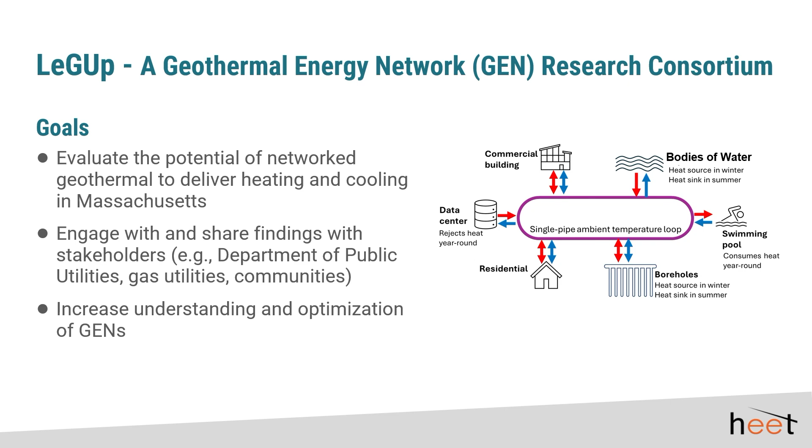And they are, for example, for the technical modeling of these systems, but also the economic modeling, as these systems get financed, what is the cost to the customer, et cetera. And the idea is to study what is the impact of these systems in the entire state of Massachusetts. So if you were to deploy them, what is the impact on a number of different factors, including health, the environment, costs, equity, etc. So it's a research project that is focused on geothermal energy networks, but within that, it looks at many different aspects of it.

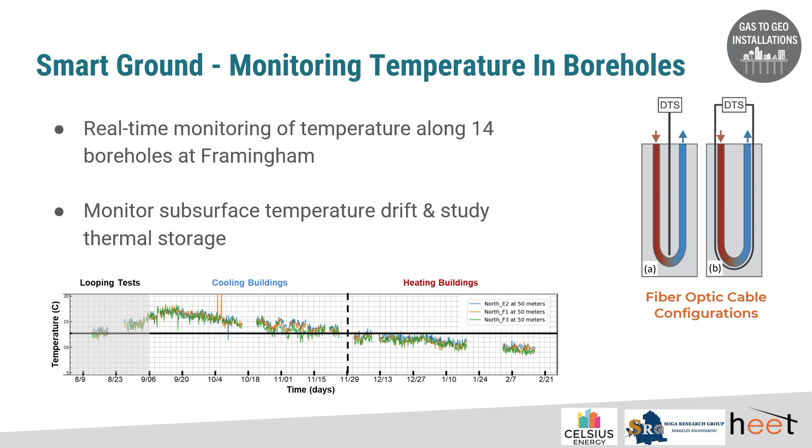Another aspect that the project focuses on is the development of these tools that are accessible. So, for example, one of the tools that is generally used for designing these systems is TRNSYS, that many of you may be familiar with. Now, usually only engineering firms have access to it, and even within those firms, only specialized teams work with it. So the idea was to create a tool that is more accessible. It's written in Python, it's open source, and it will be basically on our website. It's already functional. It doesn't have a user interface right now, but it works.

And this tool is built by NREL. And so in the modeling part, there's teamwork between NREL and LBNL. LBNL created this full physics model that is meant to capture all the complexities of the system and is used to validate the simpler reduced order model tool that was created by NREL, which is the one that we actually make available to everyone.

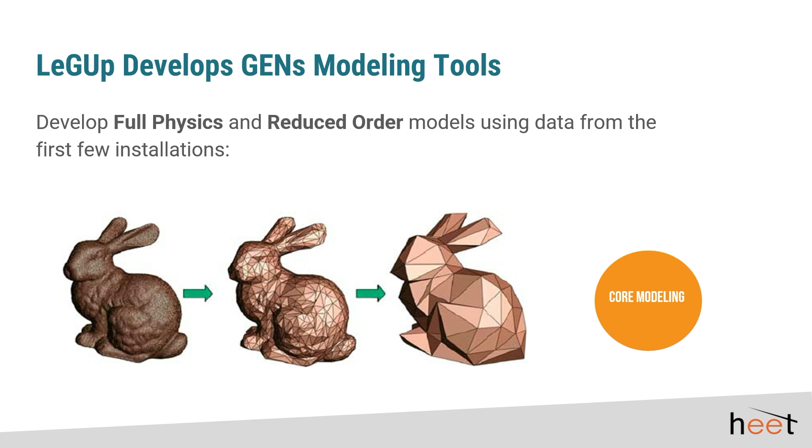So the idea is really that as you're doing feasibility studies or in the early stages of building a network, you can play with this tool and look at, okay, if I add more buildings or if I add more boreholes, what does that do to the temperature in the loop? What does that do to the coefficient of performance of the system, that will then impact economics, as was mentioned in one of the panels earlier on with a graph actually by Ania Camargo. So these tools are meant to help you ask questions about your system.

Okay, so other aspects that the research group is looking at are impact on emissions, but also on the electric grid, on costs, as we mentioned, on ecology, on health, and on equity. So what happens when these systems are deployed at a large scale?

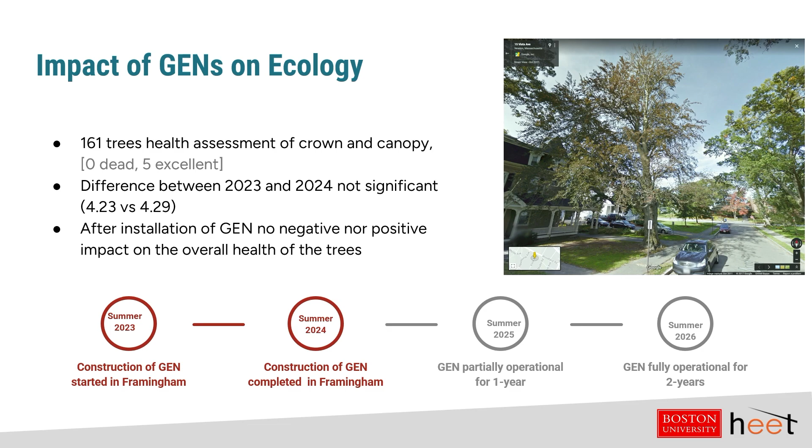So there's a number of factors that you want to take into account and to combine them together with an algorithm that you can then modify to make an optimal decision. So these are tools that are being built right now, and this product is already available, these dashboards. And we will share all of this towards the end, how you can access it.

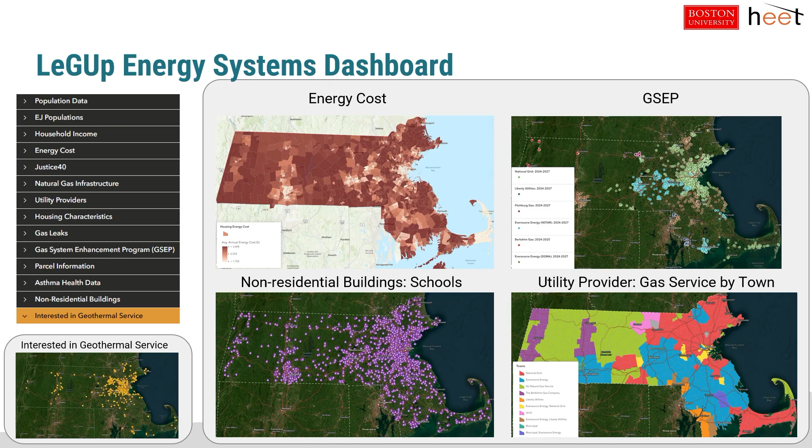My colleague Angie already talked about the feasibility program in Massachusetts, so I'll be very brief. But basically, 8 communities were funded through this research program to do feasibility studies in their communities, and 4 communities were funded to do site selection and community engagement. And some of the highlights of this work is early community engagement with municipalities and community leaders is very important to impact the momentum of the project, and also that policy and regulatory hurdles can be perceived as a challenge for those non-geothermal experts. Move on.

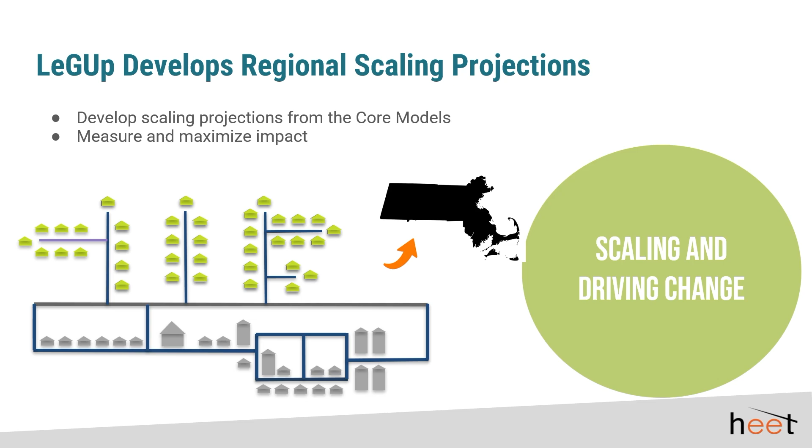In terms of deployment, one thing that we want to do is to maximize learnings. So how can we maximize learnings from the systems that are already implemented? One thing that we thought is if we have a database where we can share information in a systematic way about all of these systems, and this is already available, it's live, and what we want to do is to populate it now with data. So if you are a developer or a utility that are working on these projects, then we'd love to talk to you to populate this database.

So the idea is basically if you're a community that is doing a feasibility study and you want to know what is the size of the main pipe that was used in Framingham, you could go ahead and look at it, not only in Framingham, but in all the other projects that are in the database. You could look at the same parameter across, and it would help disseminate the learnings. So it's a public data bank to inform and facilitate the future developments.

It is hosted in the Harvard Dataverse so that it can be there in perpetuity. They have the infrastructure to do that with the databases. And we often get asked the question, if there's a project that is outside the US, can we put it in there? Yes, we can. To give you an idea of the type of parameters, we're capturing information about buildings, about boreholes, about the system performance, about the subsurface, about costs, and even about demographics.

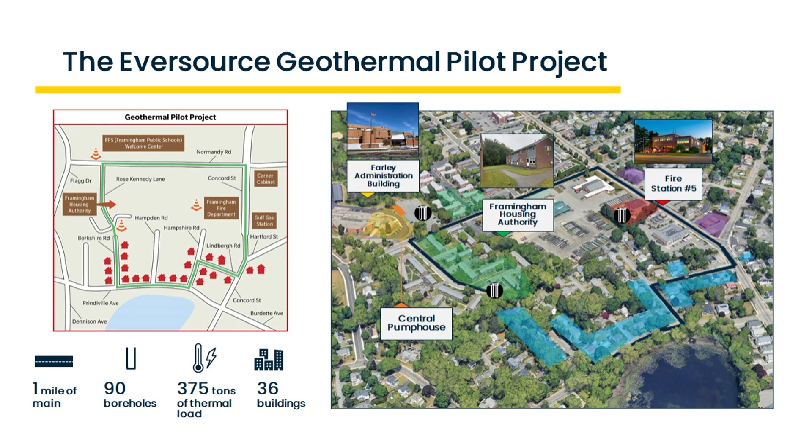So what is distributed fiber optic sensing? If you're a normal person and are unfamiliar with this technology, your mind is about to be blown a little bit here. Distributed fiber optic sensing is a technology that we can use to measure the temperature along the length of a borehole or a horizontal loop as well. And it works by using almost a typical fiber optic cable that you would use for networking, but instead of the cable transmitting binary data, it itself becomes the sensor.

And this device called the interrogator shoots a little laser pulse down that fiber and measures the reflections of light coming back up the fiber. And based on the time it takes for these reflections to return and the frequency spectrum of light that it receives, it can deduce, using some crazy math, the temperature along the entire length of that fiber. So using the device we're using in this project, we can get about a 1 meter spatial resolution and a 1 degree Celsius temperature resolution.

So pretty cool technology, but why actually go to the effort to install it in the system? And this is a question you may really have running through your mind as you tape hundreds and hundreds of feet of fiber optic cable to U-tubes, as I did. So a typical bore field monitoring solution is measuring the temperature of the fluid as it enters the bore field and the temperature of the fluid as it exits the bore field, giving us the delta T. And you can learn a lot from this, but the DFOS system gives us the actual borehole temperature along its length, as I was saying.

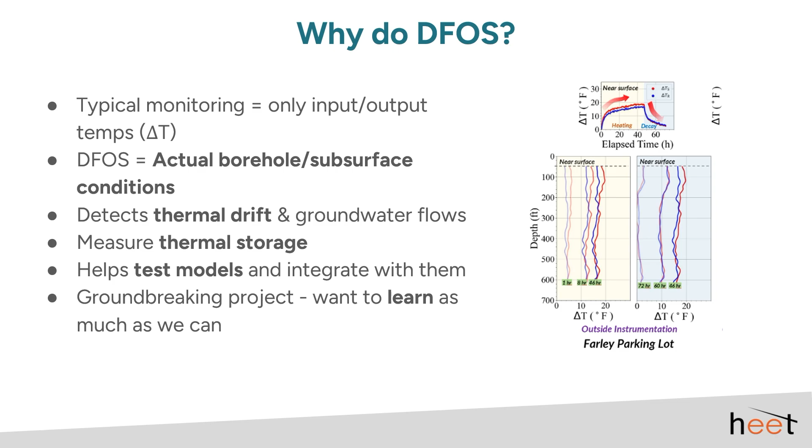So a little bit about this actual project. The DFOS installation was a collaboration between Eversource, HEET, and SOGA Research Group at UC Berkeley, who are the actual DFOS experts. And a big shout out to all of the drillers we worked with and contractors. I think Celsius, maybe someone from Celsius is here, at least in the conference they're here. And they were really helpful and collaborative on site as we were trying to install this technology. It gets complicated, so we're really grateful to them.

We instrumented 14 boreholes across the entire system, with most of them in the incline bore field on the left there. We also instrumented the 3 thermal response test boreholes and collected data from the DFOS system during the thermal response tests. And of these 14 boreholes, 2 of them are currently not connected to the loop, but they have DFOS monitoring in them. So those are going to be interesting to look at, so we can get a peek into the subsurface.

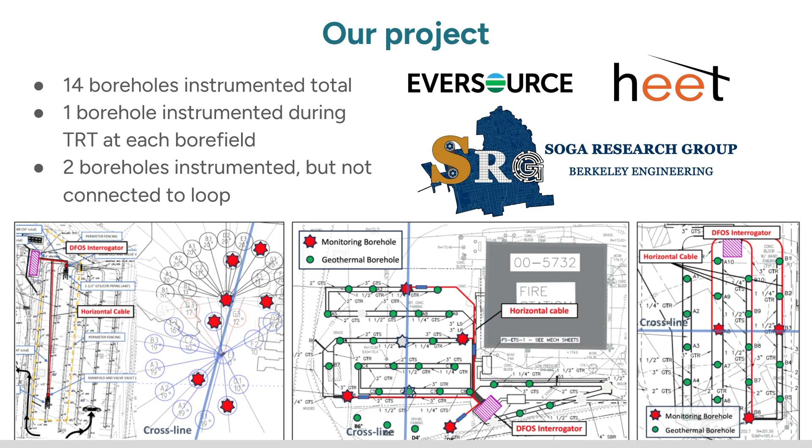We experimented with different fiber configurations throughout this project. On the right, you can see the ultimate DFOS nerd's dream of instrumenting, getting fiber inside the actual U-tube and in between the U-tubes. And this is how we started off during the thermal response testing. But to accommodate the timelines of the drillers and to just make things easier for them, we moved to these two models in the middle.

Oh, you guys can't see my mouse cursor. That's unfortunate. But oh,

So we tried this, where the fiber goes on the outside of the U-tube, and that's great because you can get the temperature going down and coming up, but it requires some pretty precise taping about every 3 feet of the fiber to the U-tube, so it does take more time. So we ended up moving to this model of just having a fiber ideally carefully centered between the U-tubes, in the middle of the U-tube. And that's how most of the boreholes in this project were instrumented.

And on the left here, you can see the double U-tube, which was used in the inclined bore field. So they actually used a double U-tube, also known as a quad loop. So because of that, we just had to kind of throw the fiber down there with the U-tube. It's not really possible to center it. And you can see the fiber here connected to the actual U-bend right there.

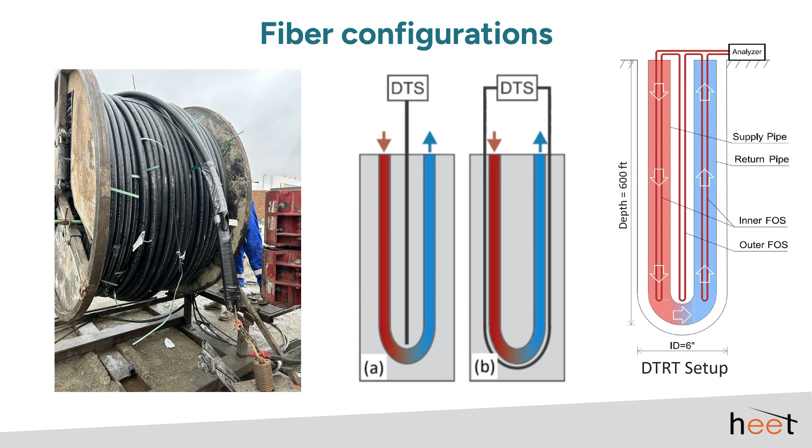So as Isabel was saying, we're just finishing up with the actual installation process. So we haven't dug much into the data yet, but we do have some data here to look at. Interestingly, this is from the inclined bore field, and the inclined bore field was split into two platforms, each with those inclined bores coming out in this pyramid shape. So soon after the system was starting up, they turned one of these platforms off, and you can see the temperature dropping there and remaining stable as the cooling load increased in these early days of the system.

Then they converged, and I think at this point they enabled this other platform that was off, and then the two platforms are relatively synchronized in the temperature of the boreholes. And as Isabel was saying, you can see the cooling load increasing the temperature of the bore field, and the heating load cooling it down, and that tapering off as the winter ends.

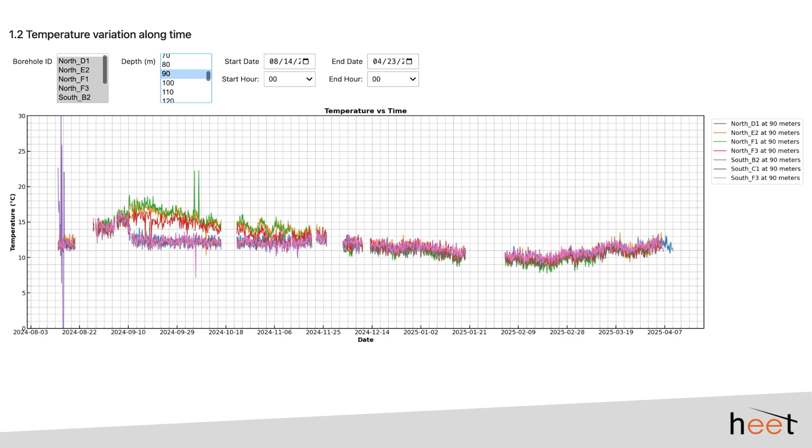This is also an interesting case. At the Rose Kennedy bore field, we have one borehole here that was not connected to the system due to a borehole collision, but we instrumented it. So the temperature is relatively stable as we would expect, but it does start to slowly drift down as time goes on. So it'll be interesting to see where that goes. And this yellow borehole here is just a typical borehole in the system with the temperature corresponding to the loads.

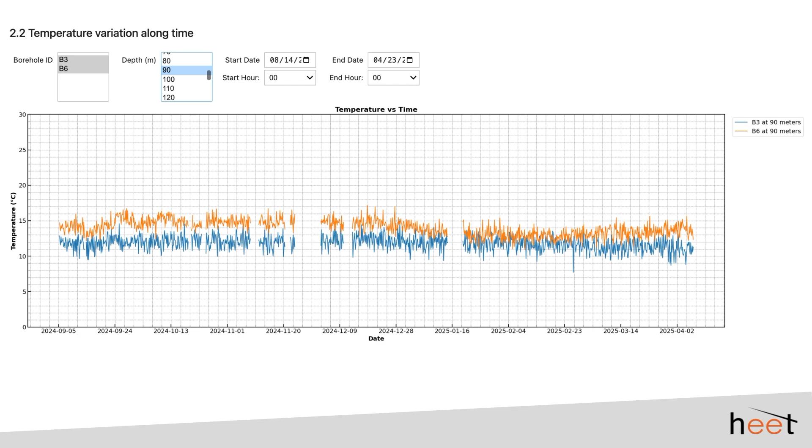So our next steps are to resolve those intermittency issues, sometimes the interrogator dropping off, as you saw, and then just to dig into the data, do an integrated analysis with the SCADA data, analysis of thermal storage and thermal drift as the system continues to operate, and the integration with the other models in LeGUP, the full system model and the subsurface model. And we're planning to share all of this data through the HEET databank that Isabel mentioned earlier.

And we are instrumenting two more geothermal network projects in Massachusetts. One is the National Grid project at Franklin Field, which we'll be installing DFOS in, and then the Framingham second loop, the loop expansion of this geothermal system. So looking forward to all of that.

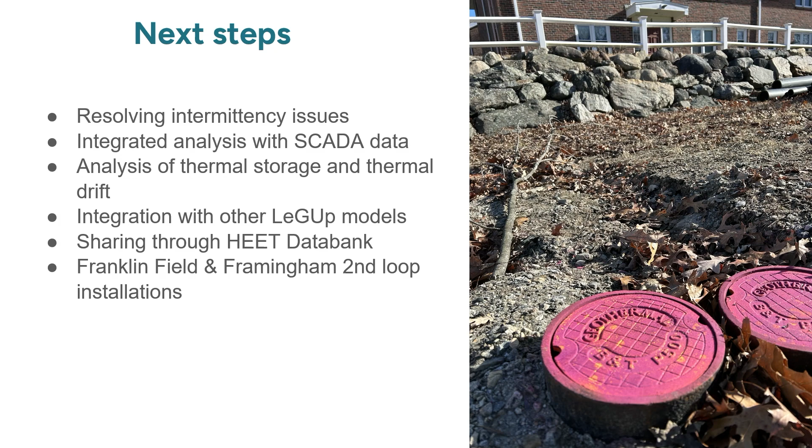So modeling is at the core of LeGUP. It informs all of the downstream objectives. Modeling is critical to reducing costs and electrical grid impacts and increasing efficiency of systems. Models are informed by the data we collect, which improve the models. As the systems are the most efficient with minimized grid impacts, the broader impacts of the systems can be quantified, maximized and modeled in turn, which creates the groundwork for scalability of the system.

But models are only as successful as transparency and data access allows. So as LeGUP just collects as much data as possible to inform the models, they improve. But we are always in the market for more data, both for the data bank or in any capacity to improve models going forward. So if anybody in the room has data, I'll just third the request on the part of the panel to make that data accessible to us, and just please reach out.

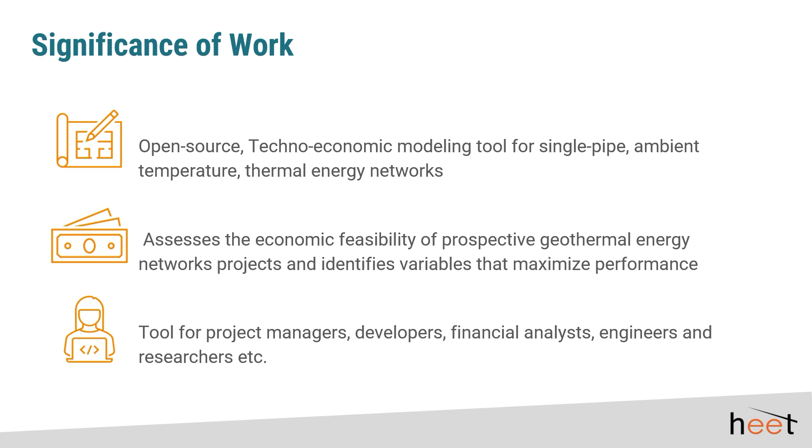So this particular tool works for fifth generation thermal energy networks, which are characterized by a single pipe ambient temperature loop that networks a lot of different ground source heat pumps that are decentralized. So these systems are the most flexible solution to serve numerous dynamic loads. They allow the integration of infinite low-grade heat sources, minimizing capital investment and infrastructure required to serve the electric loads. The systems are designed to scale and increase in efficiency as sources are added or connected to additional loops. This makes them uniquely predisposed for scalability, and that's why we're targeting them with this particular modeling technology.

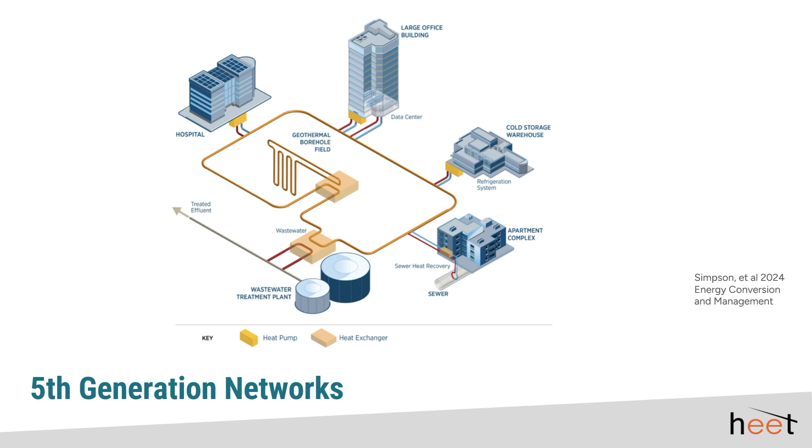So we're talking today about the HEATNETS model, which I mentioned was developed at the National Renewable Energy Laboratory as part of the LeGUP project. It is a Python-based open source techno-economic model. It is designed to optimize both energy and cost efficiency, maximizing the feasibility and financeability of these projects. The reduced order physics model captures energy flow and electricity use in the loop, and it fuels a cost estimation and economic analysis model. So we're aiming to take a holistic view of TENs using available standards and evaluate energy potential and cost competitiveness using this model.

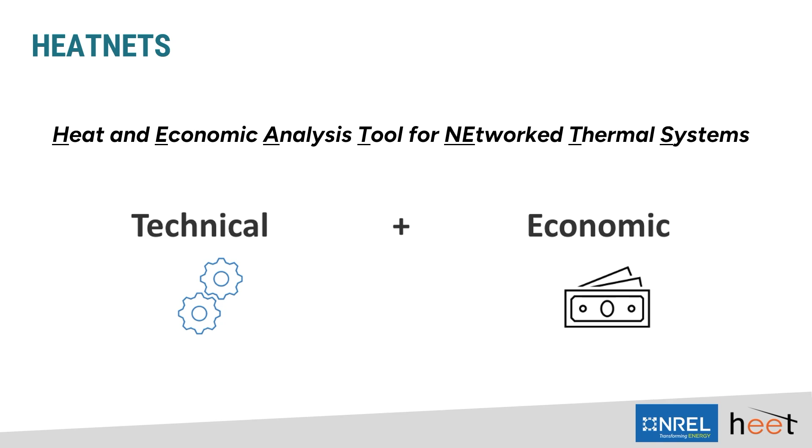So we've heard today a lot about how electricity is a component that needs to be examined when looking at the economic financeability and feasibility of these systems, where this helps us inform a way of quantifying and talking about the reduction in electric load necessity, which is one of the big positives in the system. And also electricity costs are different than the costs of other heating solutions, if there's gas, for example. And so if we can show what those actual electricity changes are going to be, we can start talking about what that is going to cost for something like the ratepayer and what a thermal energy price is going to do to something like the rate of return on a project. So that's how the physics model flows into the economics model.

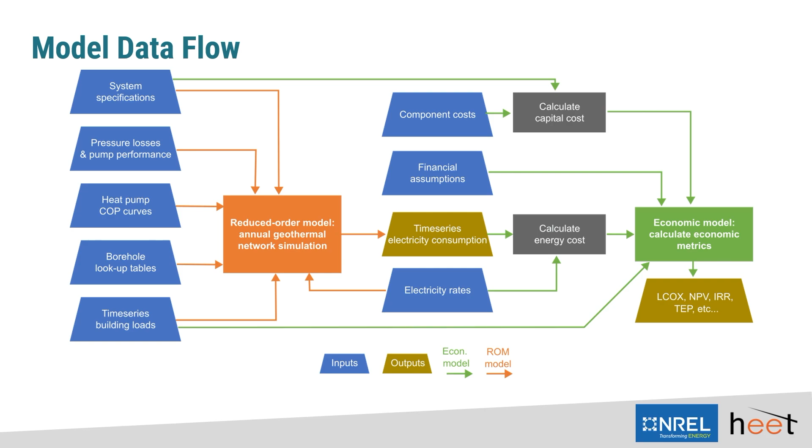So here's a little bit more about the reduced order model. This is taken from a study that was done to train the model using the Framingham pilot project, which we heard about earlier. So in this example, there are parameters that were fed into the model to train the model, and those were from the TRNSYS design, which included the building loads, the bore field performance data, and the flow in each section of the loop. The model was then used to generate information about thermal loop inertia, heat transfer, and pumping power, in addition to the energy consumption that we talked about earlier.

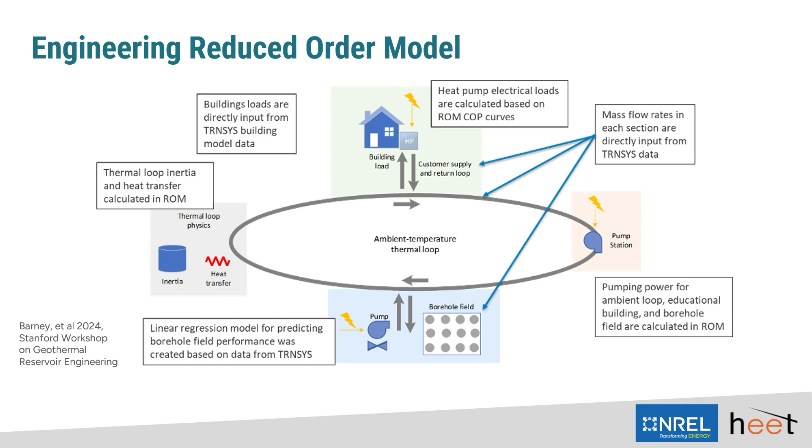Some other aspects that are not necessarily shown in this figure, but were part of the study, were takeaways that if you increase the pipe diameter, you can also decrease those energy costs of the system. Or if you add more bore fields, they're obviously going to bring down the energy costs of the system because you have new generation sources, as long as they're right-sized for the system.

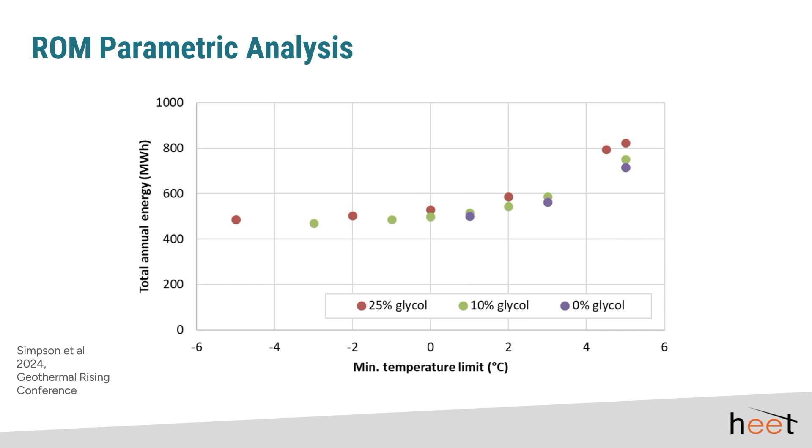So now talking about the economic model, once you have this time series electricity data, it can be input along with some assumptions about capital costs and local electricity costs and pricing, which then the model runs and spits out a number of economic parameters: the levelized cost of energy, the net present value, the internal rate of return, and then additionally the thermal energy price and building energy payments by time step.

So the model generates the levelized cost of energy, the IRR and the NPV, and then it finds a thermal energy price and it checks for a predetermined IRR. And if the thermal energy price can meet that IRR, then that's the solution. If the TEP is negative or that IRR isn't as desired, then it continues to iterate until it finds a thermal energy price.

And then when you have the thermal energy price and you have the building energy payments by time step, you can start looking at those for cost competitiveness, financeability, and how is this going to look in a greater picture: is this the energy solution that's going to be either the best economically feasible, or can it be economically feasible enough given the other benefits of the system?

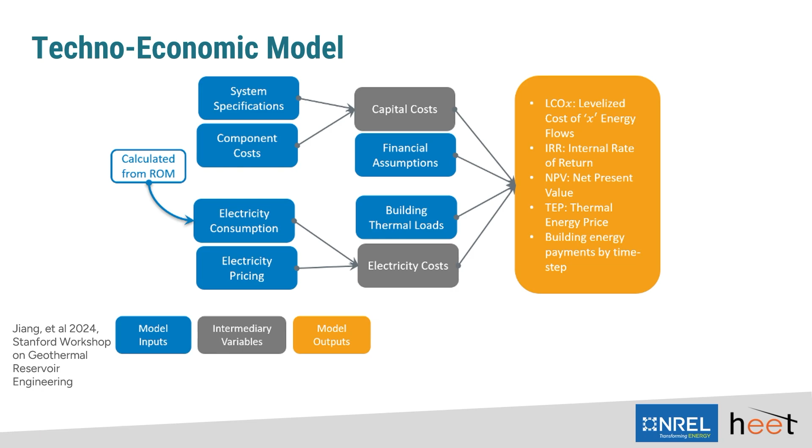So here are some decision use cases. So let's say you have a system that has given land use issues. So for instance, what is the energy density of the buildings on your system? What is the energy generation per foot of pipe that needs to go into the ground? And then what do the particular building loads look like?

Do you have sources in your system that reject heat? Do you have a lot of grocery stores? Do you have a lot of waste treatment plants that can provide heat to the system? How do those particular aspects influence the overall economic output? So if you are a small community in Vermont and you want to know whether or not the heat from one to another would generate enough electricity offsets to be really cost competitive, this would be a way of trying to answer that question.

And we can also answer questions about existing electricity economics. So if you are looking at two different systems that are in areas with different catchments and different utility electricity costs, how are those particular costs going to influence the financial picture of your systems downstream?

And then additionally, when you have thermal source potential, if you're looking at a geothermal system, what is the bedrock level? What is the aquifer situation? What kinds of technologies can you either drill or pull from to add thermal resources to your system? And then from there, what does the energy cost consumption look like as you make those changes? And how does that affect the bottom line in the end, the financeability of the system?